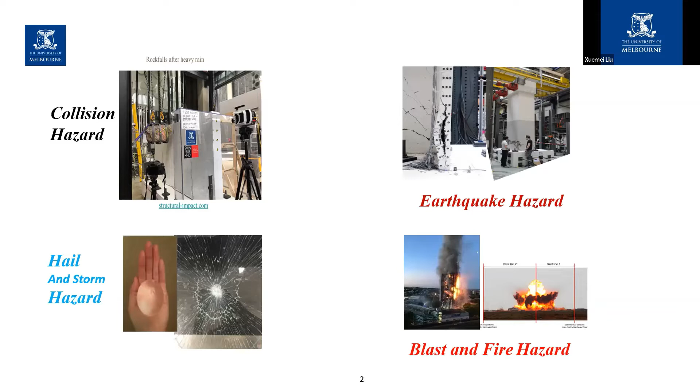So in the short course, you will also have lectures on collision actions forming part of the short courses. So this 15 minutes presentation by myself is just focused on this particular topic. So collision actions, you do have a lot of reports from journal articles in Australia itself and internationally. And normally the journal articles are about presenting a lot of tests, impact tests, and also simulations, dynamic simulations. But I was really reading a lot of these articles.

I said, look, perhaps the practicing engineers are looking at something else. They like to look at some concepts rather than saying, these are all the test results and data and charts. And we want to really understand how should we visualize impact actions, collision actions. Can we summarize it in a few algebraic expressions? And it's like what we do with statics.

Can we do it? So we are aiming at trying to develop concepts which are transformative and irreversible. That means that when you understand those concepts, you change the way you think. And it's not something that you can easily forget. And it's irreversible in that once you accept and understand this is how you approach collision actions problems, you would not look at it another way.

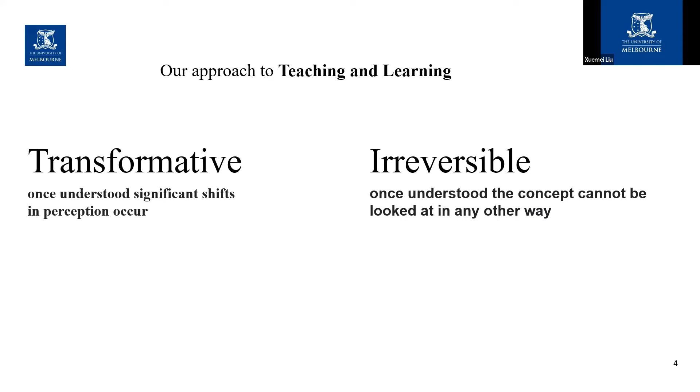Probably that is too rigid. I'm saying that when you encounter another method, you will try to reconcile anything which is new to you and absorb it in and further mature the methodology. So let's look at something very, very simple. And you would say, well, we have collision actions, hypothetically, a boulder hitting on a baffle, on the pole.

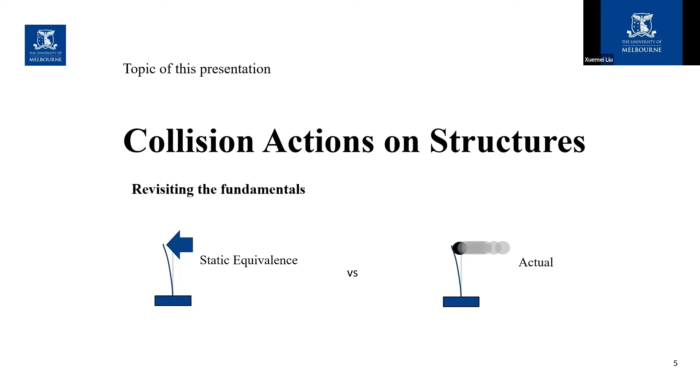And what we normally do in engineering, at least in the highway code of practice, is we apply an equivalent static force. Now I feel that most engineers look at it and think that's reasonable enough. This is how we have been operating all the time. This is really how the code stipulates collision actions. So try to make things simple. There's nothing wrong with it. Replace it by a static force.

But let me look at a scenario where initially you have got a pole, a shorter one, and you have a taller pole. And we find that a taller pole actually resists the impact better than a shorter pole. We find that with a taller pole, the bending moment at base is smaller. The deflection, according to statics, is proportional to the height of the pole raised to a power of 3. But in fact, it is not quite that rate with impact action.

So with bending moment, definitely you are getting less and less bending moment as the pole becomes taller. You'll say, why is it? Because energy is a product of displacement and force. And this is why when you allow more energy to be absorbed with a taller pole and you displace more, then the strength demand accordingly gets less.

And another thing is if you put a dummy mass on the pole, and the impactor hits that dummy mass, then a lot of the energy is pushed back to the impactor, getting it to rebound. So not that much energy gets down the pole. It's been repelled. So we also learned that in reality, you put more and more dummy mass at the top, you actually reduce the bending moment at the base of the pole too.

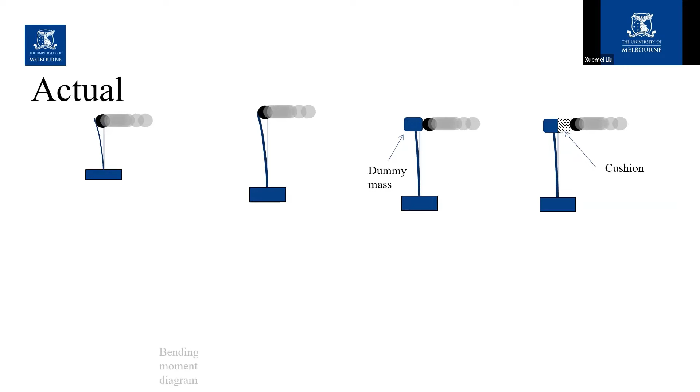It is that you actually get time for the support from the ground to get sucked up to the dummy mass, and the dummy mass actually gets larger as far as the impactor sees it. So the cushion would further reduce bending moment at the base of the pole.

But however, if you go by statics, you don't get any of that. So statics doesn't actually reflect any of those phenomena, which have been well proven by experiments. And you can actually see that in reality, the bending moment gets less and less and less, but static force doesn't.

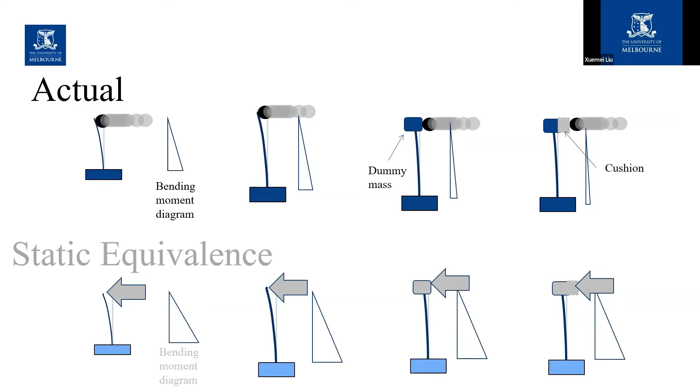So in the way that we just simply say, although the Australian highway code doesn't get into that, it's sort of stipulated an equivalent static load, but for argument's sake, this is really the well-known equal energy method stipulated by Eurocode 1. So you say, well, that force is actually the velocity of impact multiplied by the mass of the truck multiplied by the stiffness of the parapet. And that's really what determines these so-called equivalent static forces.

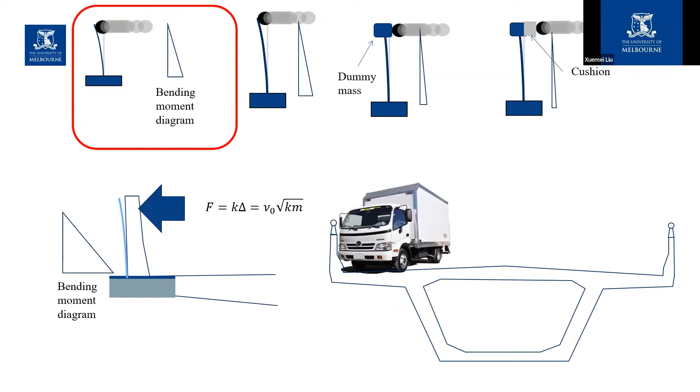So if you go one step further, this is really an analogy to what I showed there. You actually increase the flexibility, you reduce the strength demand. But however, there's a lot of catch up to do with the Australian code, that it hasn't quite really gone along this pathway of reasoning.

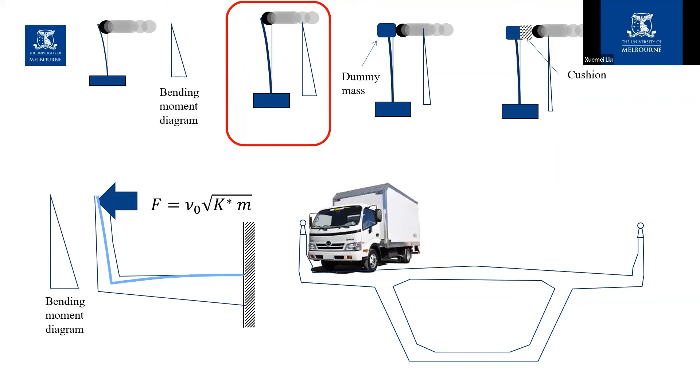So when the bridge is founded on deep sediments, so tall piers, deep foundations, there are significant rotations of the pile caps. And that would actually contribute to more deflections. And as a result, there is a huge reduction in bending moment, not only on the parapet itself, but down the bridge pier.

So you can actually see that getting the bridge deflected more would actually help a lot, because we learned from our undergraduate degree that deflection is normally checked last, because you say, oh, you check for safety, stability. In the end, you check for serviceability. This is why you calculate deflections.

But with dynamics and impact actions, deflection is really central to the whole safety and stability of the structures. The deflection behavior is not about serviceability only. So you really have somehow a paradigm shift in the way we look at impact actions.

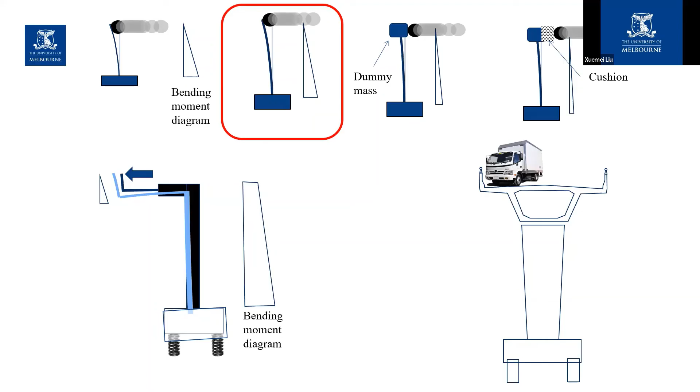Now, we get back to the dummy mass argument, and we have actually derived this expression which incorporates dummy mass, because at the moment, the challenge nowadays is you can't really find much reference from codes and from books or from any articles about how you actually get it quantified by just an algebraic expression without going to the trouble of a lot of simulation that takes hours and days, and you're not sure whether you got it right. But a simple expression is what engineers like, according to my experience interacting with practicing engineers.

As you increase the dummy mass, the bending moment gets less and less and less. And that's not factored into any codes of practice which deal with collision actions.

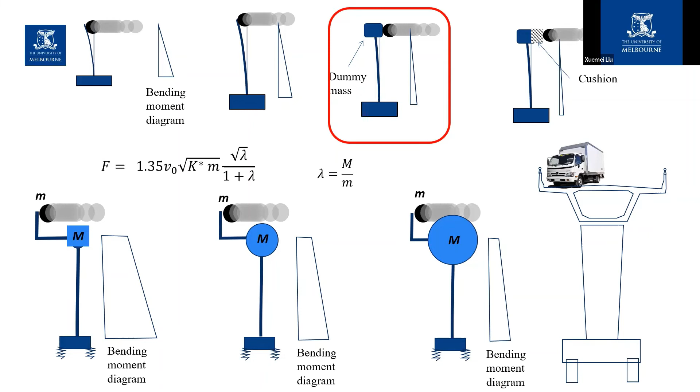And last, cushioning. Well, you say if a vehicle rams onto a barrier, it's not a hard object because the front of the vehicle crumbles. And that crumbling is really an analogy to cushioning because there is a delay in the transfer of momentum. Now, we learned about the equal momentum principle at school, and in that case our physics teacher also looked at that dummy mass there, but without a stick, because it was a physics class, not a structures class. So there is no issue of any energy being sucked up from the ground and causing cushioning.

So our physics teacher didn't teach us that. But in fact, what the school physics teacher taught us is really part of a bigger picture: that you have dummy mass mitigating structural actions, and with cushioning, it is even to a bigger extent. So that's why we have also done this. I acknowledge Dr. Scott Menegon here and my former student Arnold Yong, who derived the cushioning factors for different types of trucks, really going through some months of work in simulations to get the cushioning factors here.

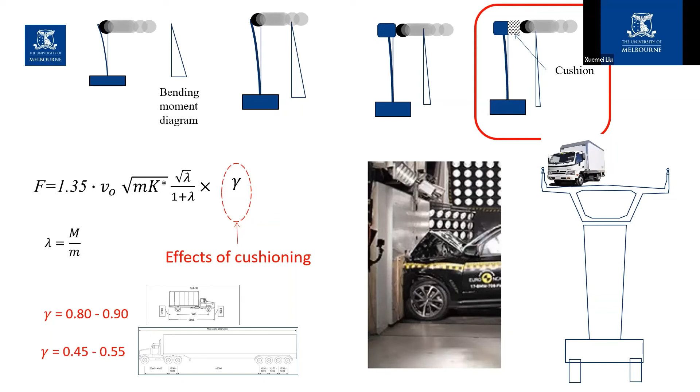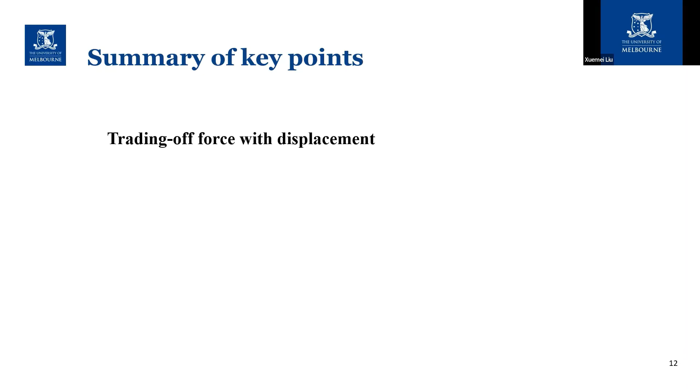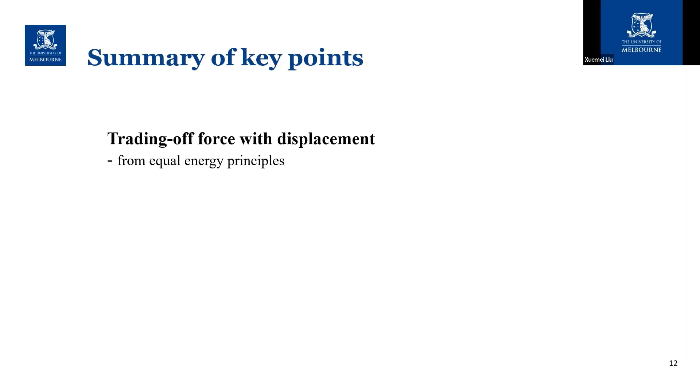So, summary of key points. Yes, we like to really make design simple. Yes, we like to retain the static method of analysis, fine, but make sure that you observe some fundamental principles: energy, the trading off of force with space. If you violate those principles, then it's no surprise that what you actually get down on the calculation pad doesn't reflect real behavior.

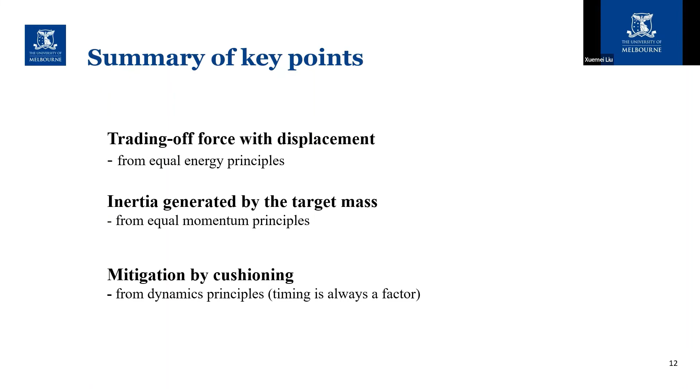And also take into account Newtonian mechanics, inertia generated by target mass. There's nothing new, but what is new is that we have yet to incorporate it into design. And cushioning. So it's also dynamics. And I think we also need to revisit the way we educate our students. Statics is absolutely fundamental, but we should also introduce time as a dimension early on in engineering education. We haven't quite done enough to introduce the time dimension when dealing with structural analysis.

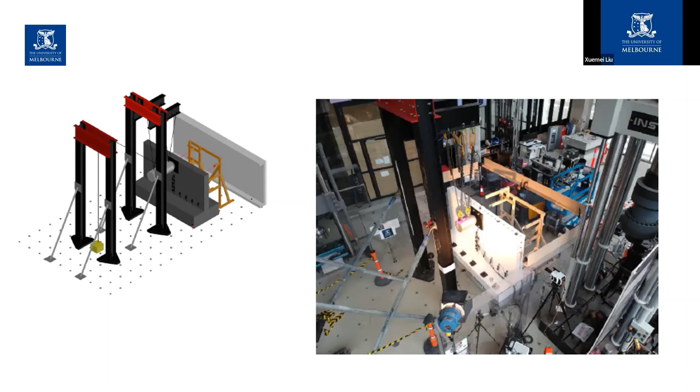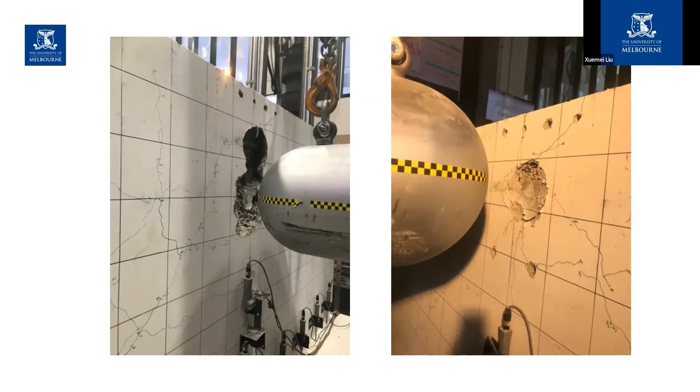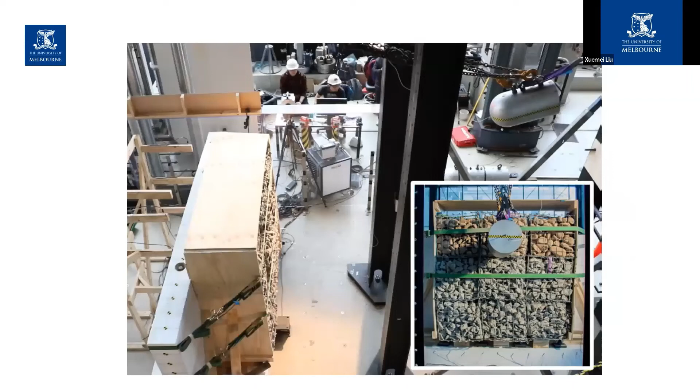So we have not only come up with this expression, we have actually done lots of tests. And I also acknowledge Dr. Scott Menegon, who helped supervise students back in 2018 and 2019, doing lots of tests to really educate us. And now we have got a method of working out how much impact would produce permanent indentations on the wall, how much would cause spalling of the wall, and how much would cause punching of a wall in a collision scenario.

And in the rockfall barrier design, we put gabions filled with pebbles acting as cushioning. So cushioning is not necessarily pillows, cushions, rubbers. It can be in any form which delays the transfer of momentum. So including the crumpling of a vehicle or even gabions, they are cushions. They are very effective cushions.

So we are about to roll out a textbook, which is about 400 pages in length. Starting in early 2020, we were offered a book writing contract by Taylor and Francis. So we got together a team of Dr. Arnold Yong, myself, and Dr. Scott Menegon, spending almost 30 months writing up this book, which is going to be published in September this year.

The first two chapters look after readers who have low prior knowledge on dynamics, but if you have some knowledge on dynamics, you may skip chapter 2 and go straight to chapter 3. Then after chapter 3, you may pick the topic of your choice. We have spent a lot of time writing up 2 chapters on bridge collisions, and also collision on concrete. Dr. Scott Menegon in particular put a lot of contributions into this area.